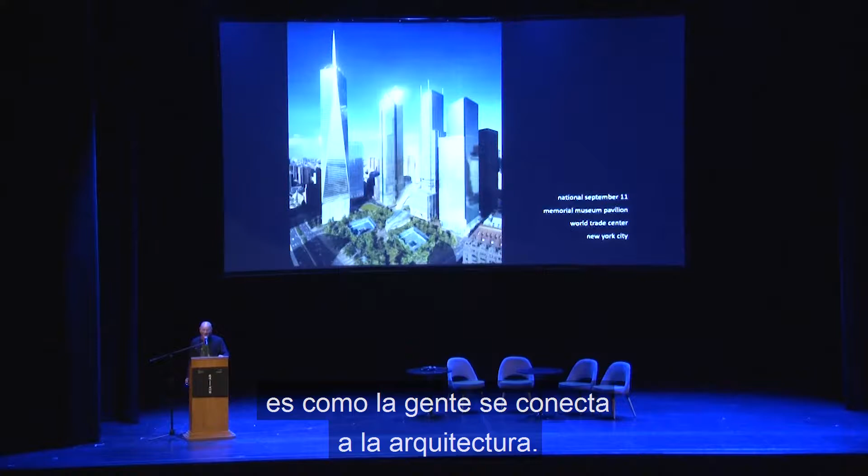Another project which is very interesting in terms of how people connect to the architecture is the National September 11th Memorial Museum in New York City, dedicated to the events of September 11th, 2001, when the World Trade Center towers and a number of other places were attacked by terrorists in planes.

It was a terrible and tragic event, and the rebuilding of that site, if you have never been there, is very hard to comprehend. I suppose an equivalent would be knocking out a very large portion of downtown Buenos Aires, losing your public transportation, losing your government systems, losing electricity. A number of tremendously difficult situations evolved from that day.

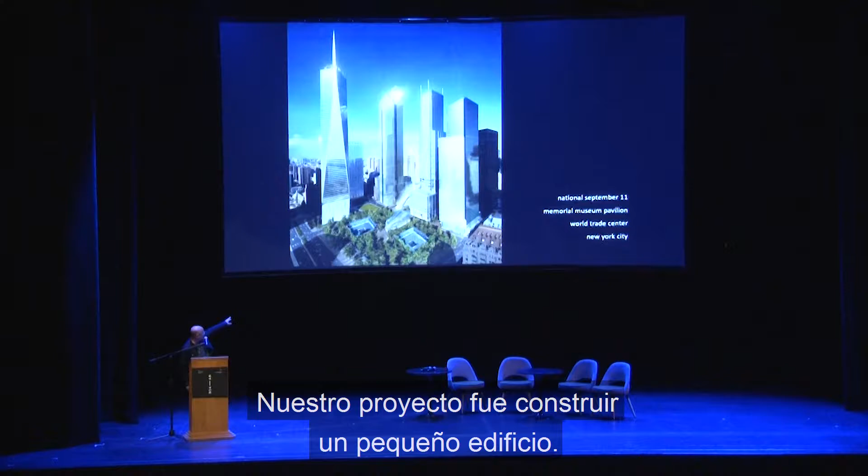So to rebuild that site means you have to work with trauma, with people who have a traumatic psychological connection to this place. Our project was to build one of the only buildings on the memorial site. You can see the small pavilion between the two pools where the World Trade Center towers once existed. The pavilion is quite small in comparison to the tall skyscrapers that exist around it in New York City.

Sometimes I like to say that building small is a luxury. Building big is a kind of gluttonous, overwhelming activity. But building small is truly a luxury in a big city. So we wanted to work with the small character of the building.

We worked with daylight so that the facade of the building would create daylight. It's a stainless steel which has microscopic scratches in it that collects the sunlight and ambient light, so it doesn't need to be direct sunlight. It collects light and reflects it off the building.

So this facade that you're looking at is actually the north facade of the building. It gets no direct sunlight at all, but you can see these bright flashes of light coming from all of the ambient light that exists, being put through the reflective character of the facade and then pushed back out into the environment.

So the building is always filled with light, and one of the characteristics we were most interested in creating here in this place of sadness was to allow people to have a sense of happiness and a sense of optimism. Light is the first step that allows us to see an optimistic future. And understanding ourselves is also interesting.

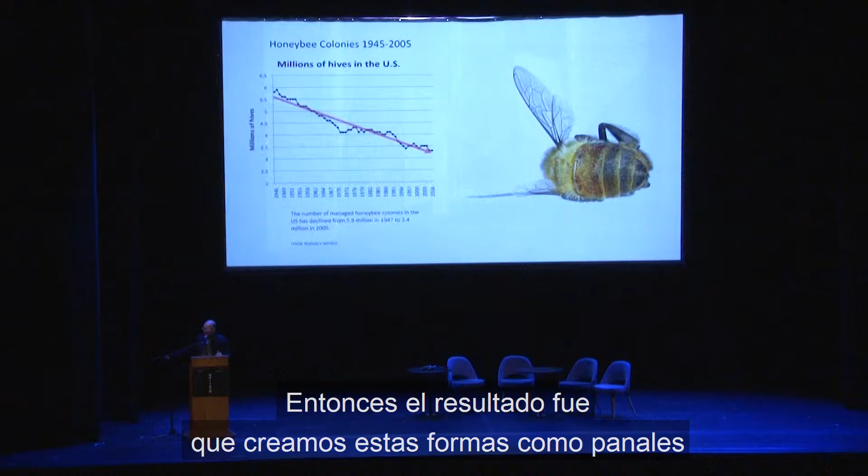So we realized the only way to get people to accept these beehives was to make them really good-looking, super sexy beehives. Then everybody would want one because they're being sold as design rather than bee habitat. The result was these hive-like shapes that can be placed on top of buildings, with a small entry—you'll see in a moment—that increases bee habitat without allowing for domestication.

A traditional beehive can last up to about 7 or 8 years without intervention. A bee in the wild would use a place in a tree for about that time, and once it gets filled up with muck and dirt, the queen bee will just fly to another location and make a new hive. But with this design, you can clean it out every few years and keep it going.

Here you can see the hives mounted on the roof of a building in Oslo, with a very simple entry location. They're really good looking, so a lot of people are now clamoring to get these beehives on their houses, and it can come with a startup kit to get it running.

You can see how the hive was created in relation to natural forms that the bees may be familiar with, except on a much larger scale. We used wood because bees are often used to wood as a natural fiber for building their hives within.

It's interesting when you think about wildlife in relation to architecture. If you look at traditional or historical architecture, for example here in Buenos Aires, there are buildings over 50 and up to 100 years old or more. When you look at those beautiful old classical works of architecture, you'll find a lot of ornament, and often the ornament has animals in it—you might see a lion, a fish, or birds carved into the facades of buildings.

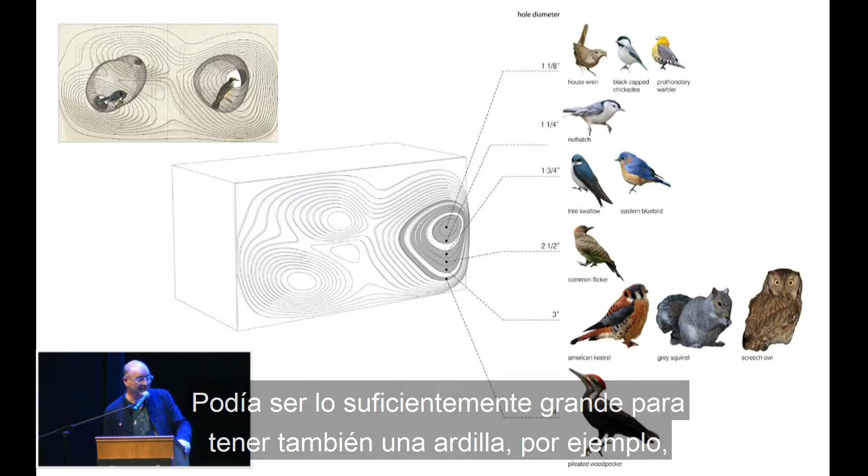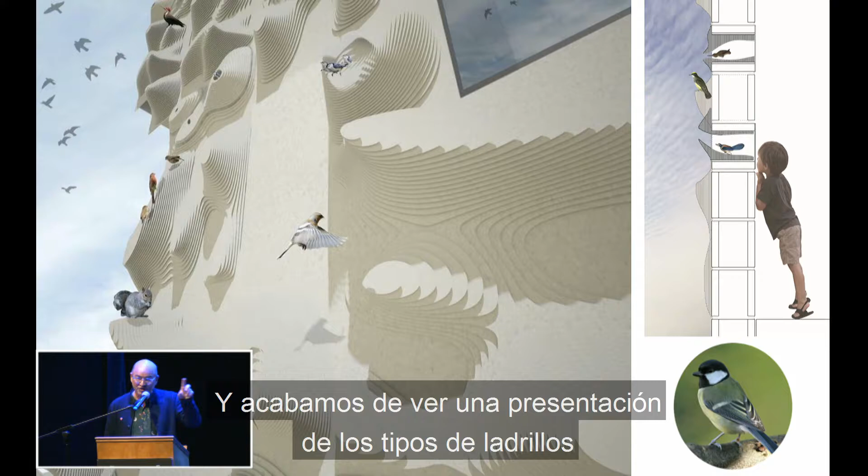You can see the design at the top left, and what happens is it gets inserted into a brick wall. Earlier, just before I spoke, there was someone here from the brick industry showing bricks with little holes in them. So you could theoretically create a brick made exactly with holes for the shape of a bird nest inside it, and then rotate it so it can be accessed by the nest.

On the back side, inside the building, it's possible to put a one-way mirror so you can see in, but the bird can't see out, and you can watch the bird nesting. It'd be kind of an amazing thing to watch. This is probably our second smallest client there on the lower right—a little bird, bigger than a bee.

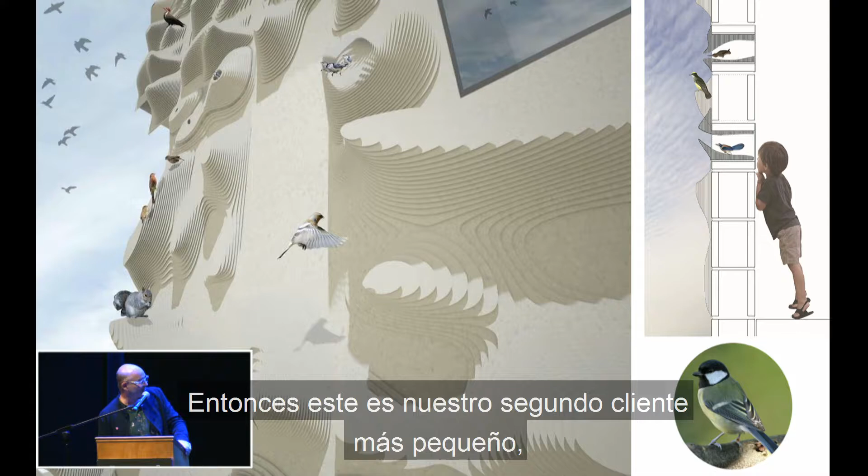But all of these projects are bringing us to an understanding of the world we inhabit beyond that where humans live.

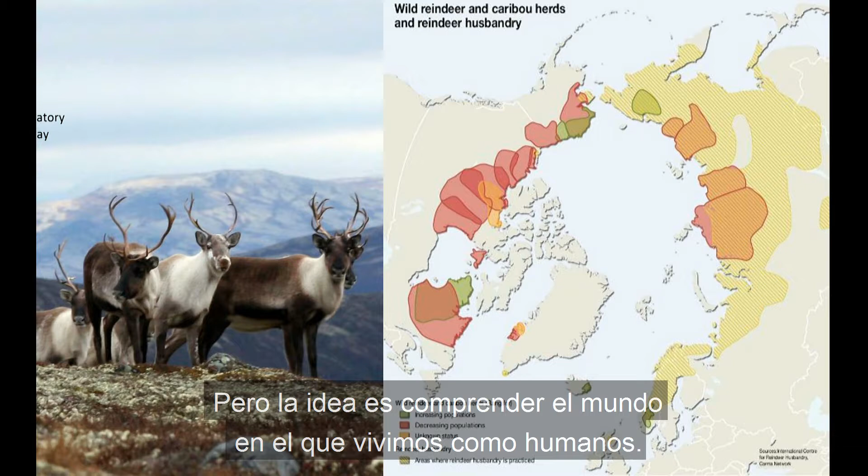This is another project we created in the north of Norway, in an area where wild reindeer migrate. There are only a few wild reindeer places in the world, and this is one of them. The wild reindeer migrate through a valley at the base of the mountain Snøhetta, which we're named after. They need a quiet environment in order to mate.

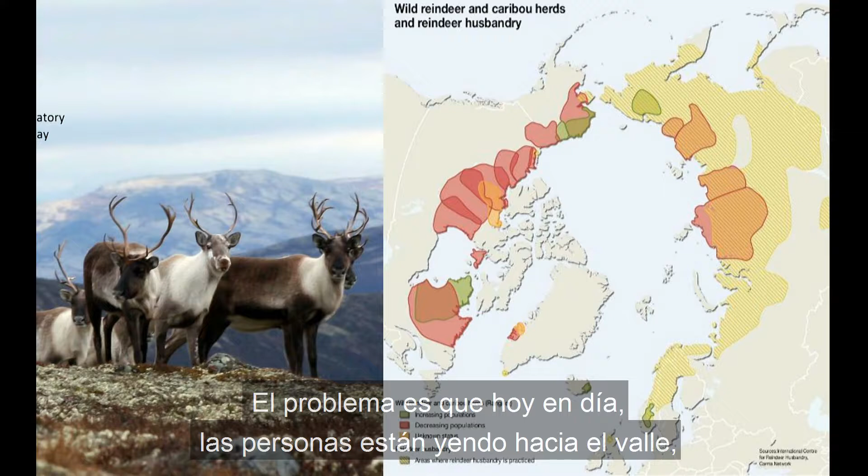The problem is that these days people are coming to the valley to watch the reindeer migrate, and the reindeer are bothered by all the people coming. So we needed to find a way to allow people to enjoy the experience without interfering with the life of the reindeer. We built a sort of pavilion with a wood bench inside, carved by a robot arm—a digitally produced element in the building.

You look out through this glass down into the valley, and if you look in the distance where that cloud is, that's the mountain Snøhetta we're named after. It's an interesting story, and you'll see in a moment what I mean. These brackets you see on the glass were not originally installed—they weren't part of the original design. One thing we failed to understand is that there are animals called musk ox.

I hope the translator knows the word musk ox—it's kind of like a buffalo that lives in this area, and the male is very aggressive. The musk ox would come to the glass, and the male would see their reflection and think it was another male, attacking it by running forward and slamming its head into the glass. So we forgot to think about musk ox.

It was not on the list of things architects normally think about. So we had to do two things: reinforce the window, but more importantly, lower the landscape outside so the musk ox could never see its reflection in the glass. A very unusual thing to consider.

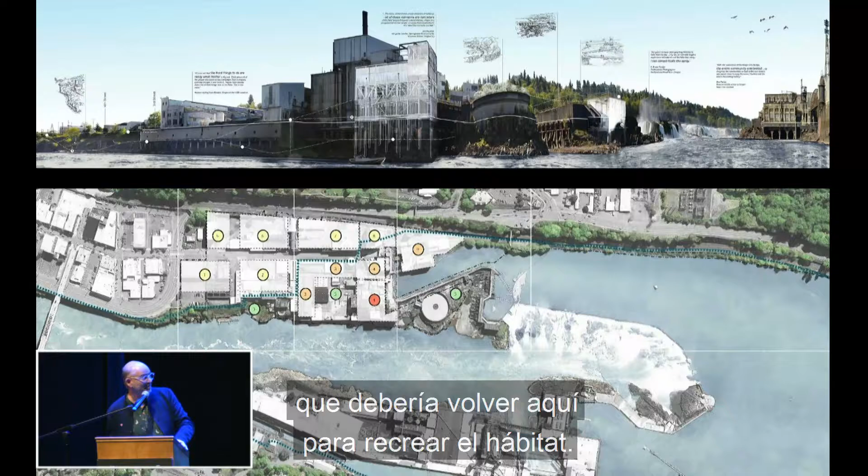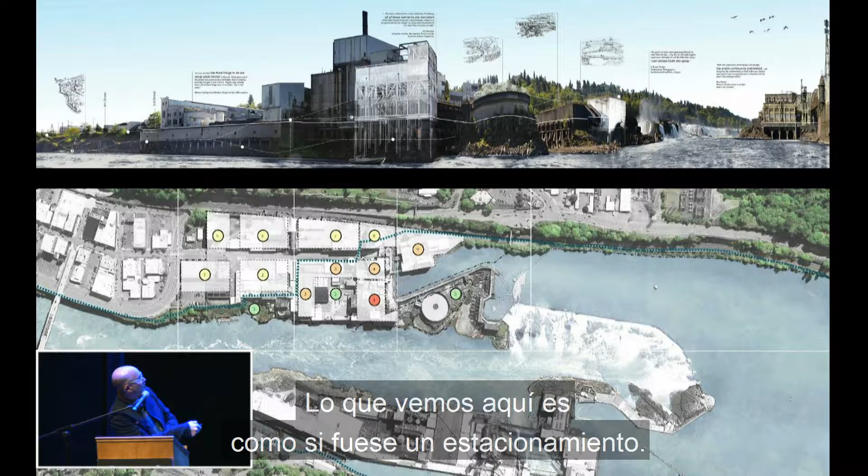So here you can see the edges of the existing situation. And what you see here is like a big parking lot, big flat space. So if you walk along this road and turn into this parking lot, you'd think everything was flat.

But we discovered when we were climbing around the space, figuring out what to do, under the concrete is the natural terrain of what was there before the industry moved in. So they built everything on columns, and it's floating above the natural landscape. So we recognized we could pull these concrete surfaces up and re-expose the landscape and allow the water to flow back along the edge of the waterfall.

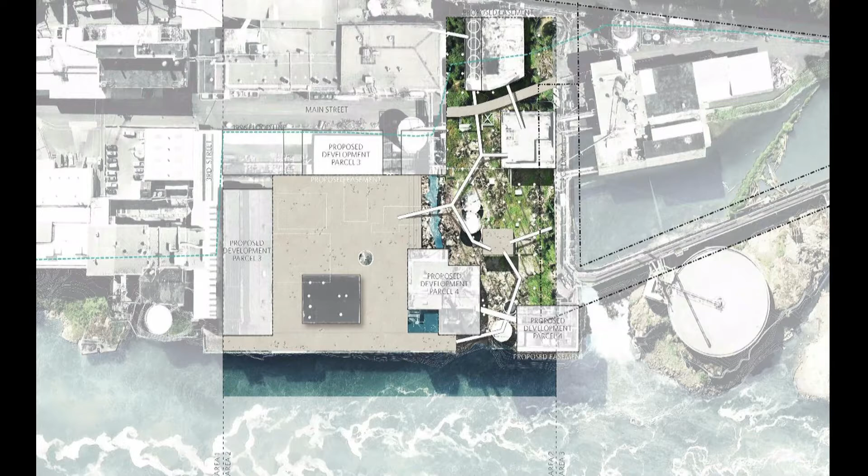So here you can see, maybe you can see how we did it. This is the concrete parking lot that I was describing before, and what we're doing to it is pulling the concrete up, re-exposing the terrain, revegetating the terrain, and allowing the water to move from its existing locations through these spaces and down into the river.

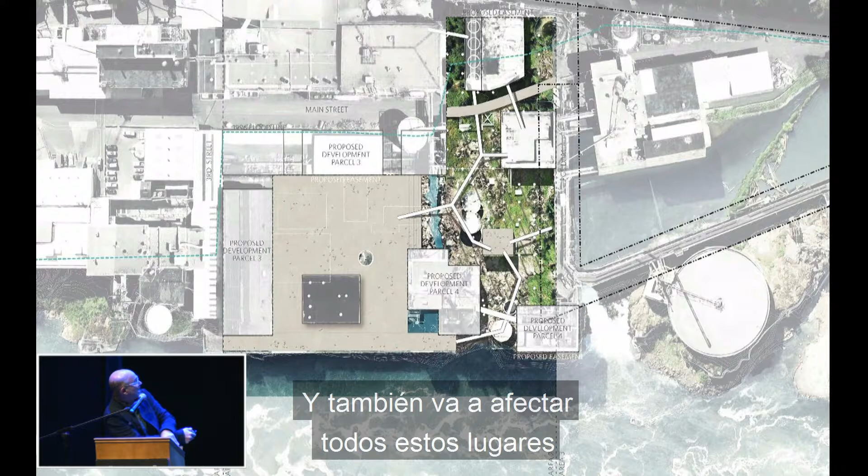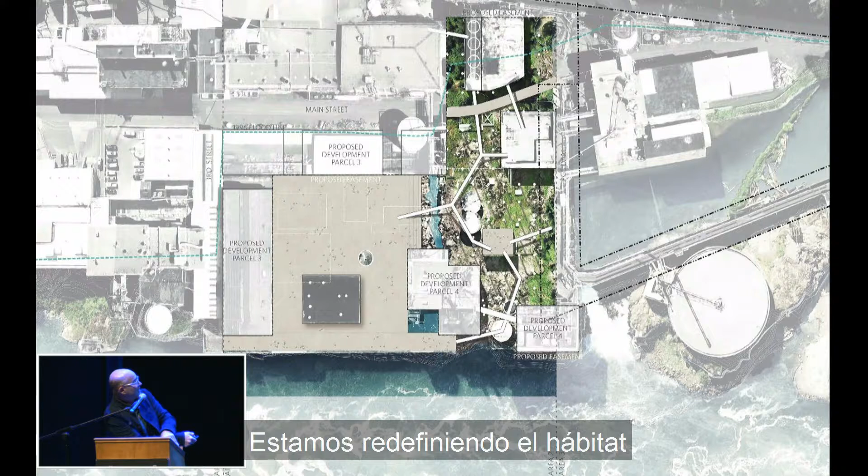And it will move along all of these spaces as we allow the water to flow under these surfaces, because, as I said, it's natural landscape under there, and it will reappear in other locations. And we're redefining habitat in some of these industrial spaces where we will put landscape in them and create new places for birds and other animals to live.

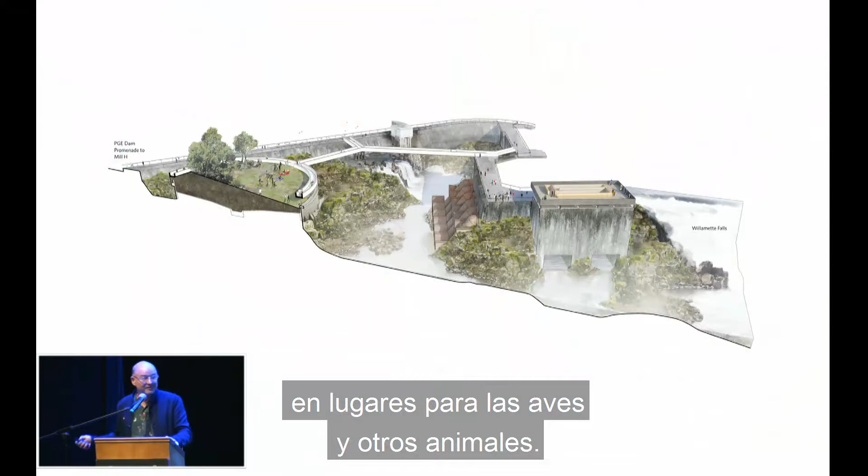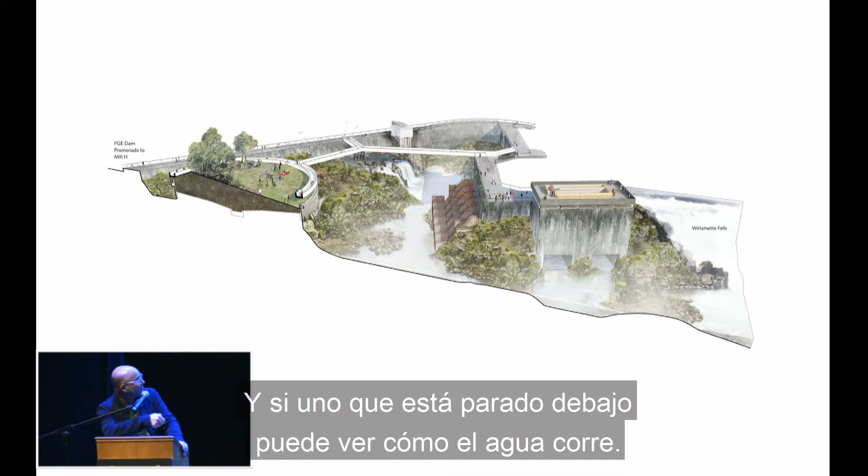Here you can see some views of how that will be once we're finished. And this is an amazing building here. In this case, we are allowing the water to run through the building under your feet. And as you stand up here, you can look down and see the waterfall running. So you're experiencing both the historical architecture and the natural phenomenon at one time.

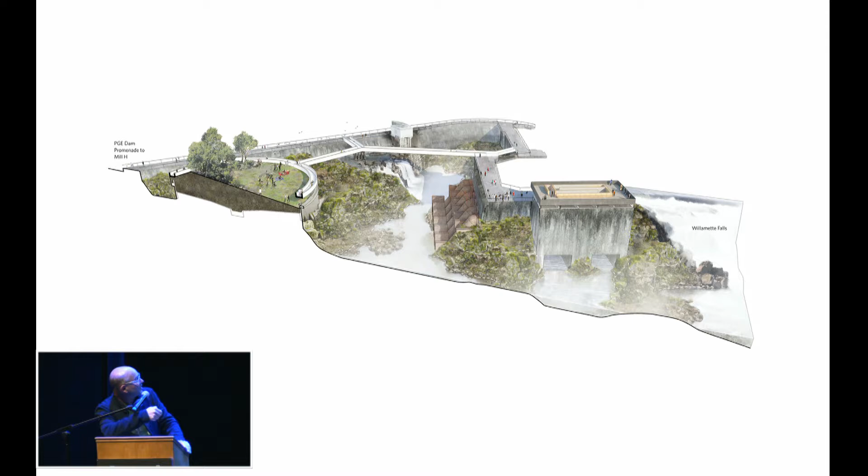And here's where water is coming around the edges and spilling over. And at certain times of the year, this will flood and be completely underwater because we're reopening streams upstream.

Apparently I'm hitting some funny button. There you go, I'm hitting the blackout button.

Here you can see that structure I just mentioned to you, where you can walk along that wire frame, look down, and it gives you access out to where the waterfall is, so you can enjoy it for the first time in about 150 years.

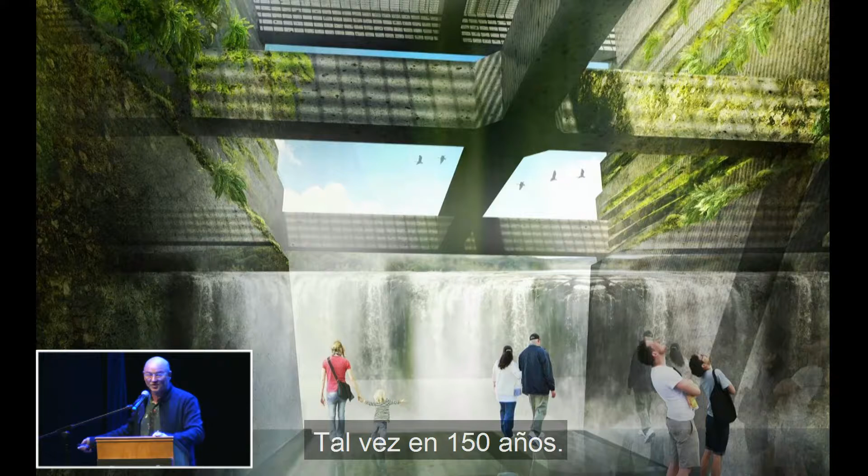We'll cut through some of the concrete structures and build bird nesting areas at the top where people can't touch them, and once again provide access to the water's edge so that the people will feel they can enjoy these structures. Once again, here's some more habitat we're building into these old concrete structures, concrete and steel.

This is a beautiful one. It's a silo, and you walk through the silo on a wire bridge, and it has a dome top with an oculus. And so when the water flows below you, the sun comes through the oculus and reflects back up into this space, and you'll hear the water and see the reflection of the light off the water at the same time. Should be very magical.

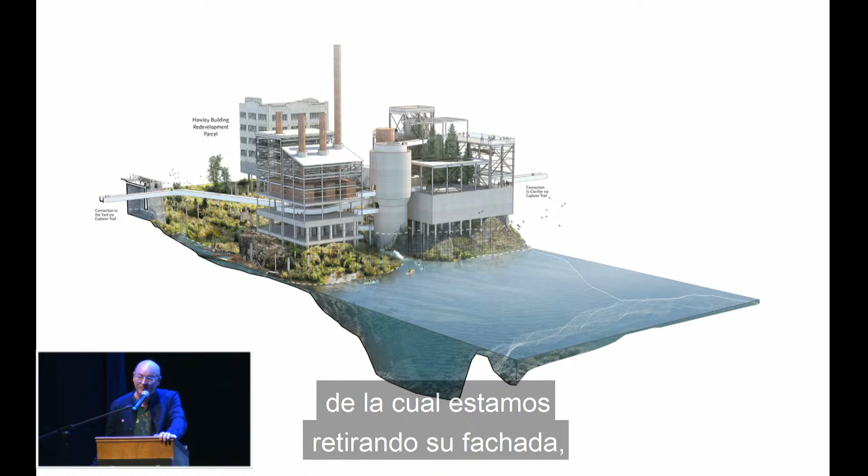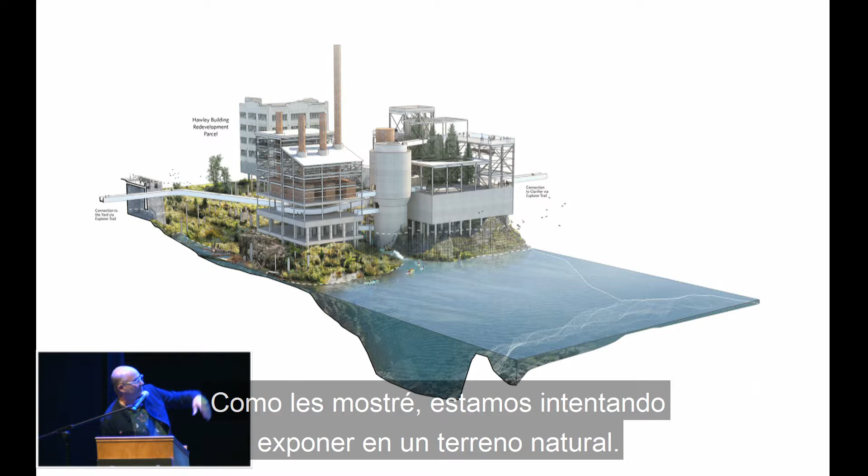Here's another building that we're ripping all of the facade off, which is very dangerous metal facade, and planting a forest inside of it and making some play areas for children, and as you can see, removing more concrete to expose the natural terrain. And this is looking at that building where there's a fun children's slide. If I were a kid, I'd really love to climb up there and slide down this thing.

And then this on the left is this concrete tank that I showed you, a big circular tank. It's currently empty and concrete, and we're going to fill it with soil and make a garden inside of it that you can walk around.

Another place where you're looking off to some of the cultural facilities. We're leaving the brick chimneys exposed. This has led to a number of other projects along the water.

This is our most recent and rather famous project. It's in the news, I think, everywhere right now.

It was built in a shipyard and brought by boat to this location and dropped into place. It actually opens in a month, so although I only have renderings right now, the building is nearly complete. It's fairly easy to find online if you look up Under and Snøhetta - either something really weird will come up, or it will bring you to this building. You can see how it works.

You come down under the ocean, and what's important about this building is it's not just for commercial use. The concrete has been treated on the outside to maximize marine life, so it will grow oysters and shellfish on the outside surface. We're training the fish to come here so they'll have a safe place to find food and an environment for mating.

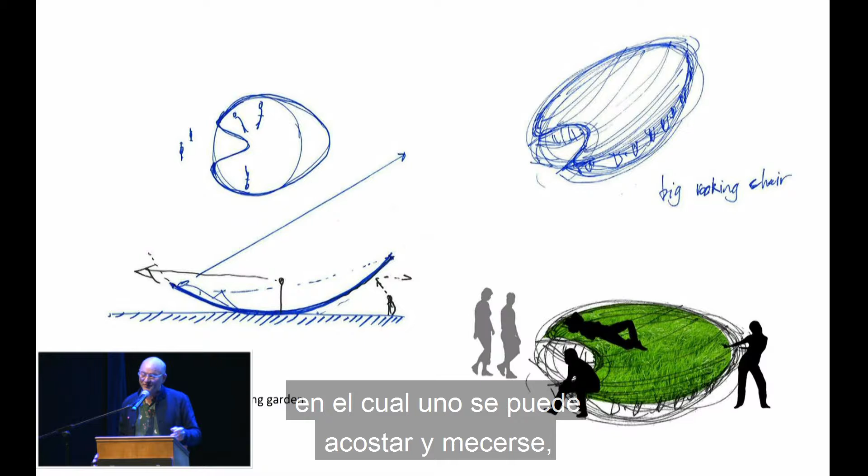We have a number of these projects, but a smaller project which was fun was an urban project in which we made a park that rocks like a rocking chair. We made a little garden that you could sit on and rock back and forth as if you were in a rocking chair, and it was to be placed on the sidewalk in San Francisco.

The problem was one of the architects had a dog, and the dog just constantly wanted to pee on the grass. So we had to spend a lot of time telling the dog it couldn't pee on the grass, which was a very strange thing to do in an architecture studio.

But we eventually finished it, and it was set up, and it became very popular. It was up for about a week. They want to build some more of these. The kids really loved it because they really liked rocking on it. It was safe and soft, and it smelled good - the grass was smelling very good. So it was an interesting way of bringing a small park into a very busy city like San Francisco.

Working with children is always fun, and if you've never had the opportunity to do something where the children are the client, I hope you will get that opportunity one day, because kids just are so open and crazy. As an adult, you can more or less propose any crazy idea, as long as it's safe, and everybody will accept it because it's for kids. When it's for adults, we say, oh no, that's not mature. But for kids, it's okay.

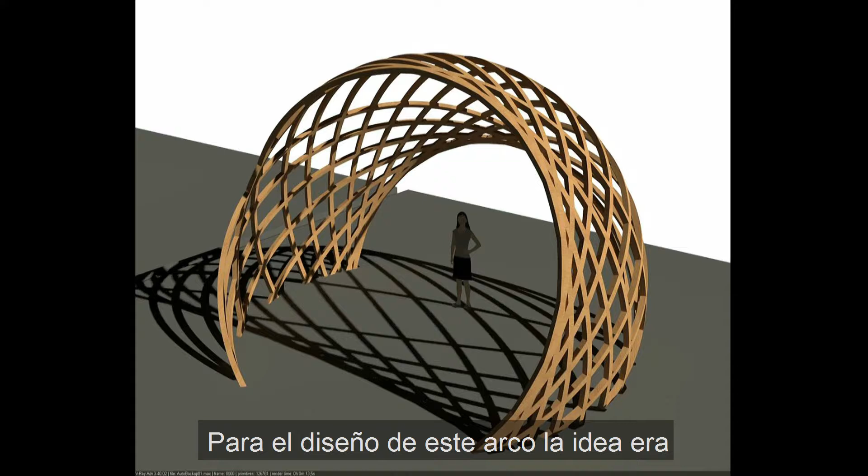So the design for the arch was to intertwine 14 pieces of wood in such a way that they would be self-sustaining and self-supporting structurally, so they would hold themselves up. And you can see that the sphere obviously is a very good way to do this.

These were pre-stressed into the circular shape and then woven into each other, and each one of these wood beams has a line from the Constitution in it.

When we showed this structure to Desmond Tutu, who's very old and has a very good sense of humor, we asked him how he liked the architecture and design of this big sphere, since it's dedicated to him. He said it's very nice, but I think you have to work harder to make my nose more accurate, referring to it as a statue rather than an arch. He was just joking, but he really liked the contemporary architecture and where it was taking South Africa.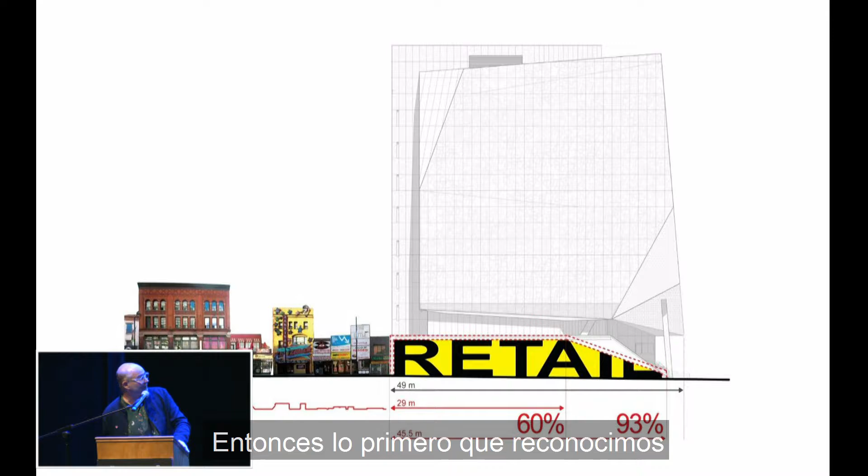So it brings us back to the polar bear discussion we had earlier. This is going to make people angry, and it will create a kind of strange environment around it, which it did over time. So our job was not only to add on to this library, but to help improve the environment around it. So the first thing we recognized was that we needed to have shops and retail in the lower portions of the building.

But rather than just adding shops, we built them with a ramp that leads you up into a raised lobby that brings you into the library above. And the shops would be at the same scale as the nearby shops.

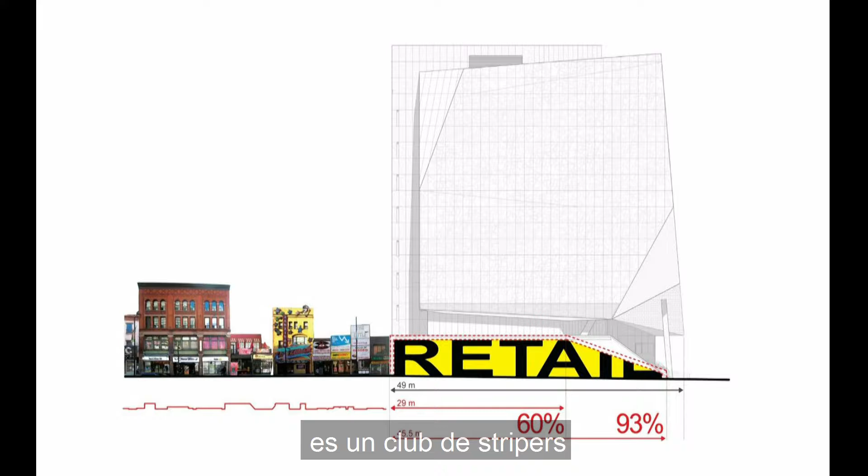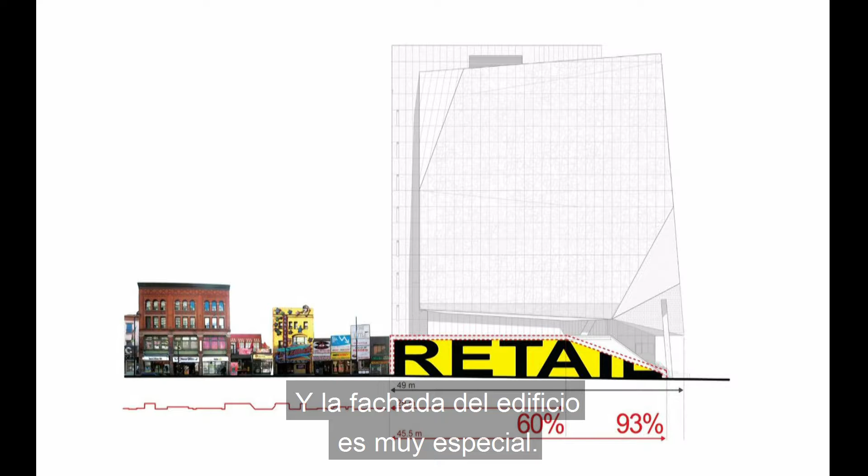It's very funny, one of the buildings on this street, if I can get this to work, this building here is actually a strip club, a place where women take off their clothes and men come to watch. And amazingly, the facade of the building is so special that the city of Toronto actually gave them $500,000 to maintain the facade as a historical object.

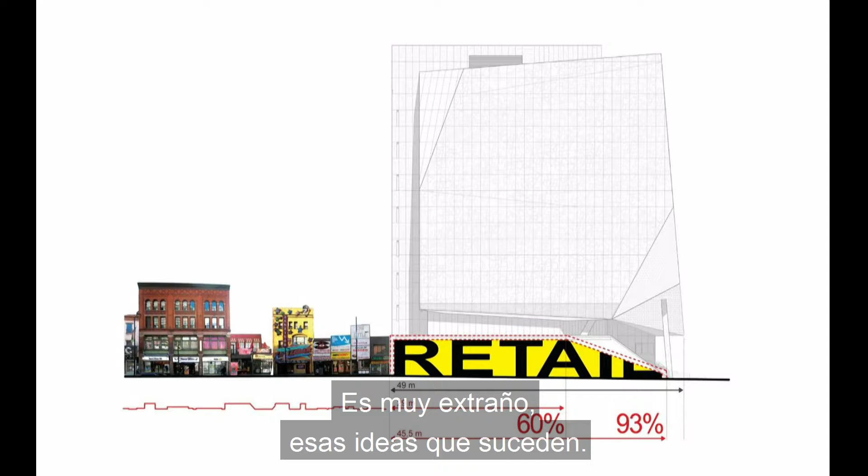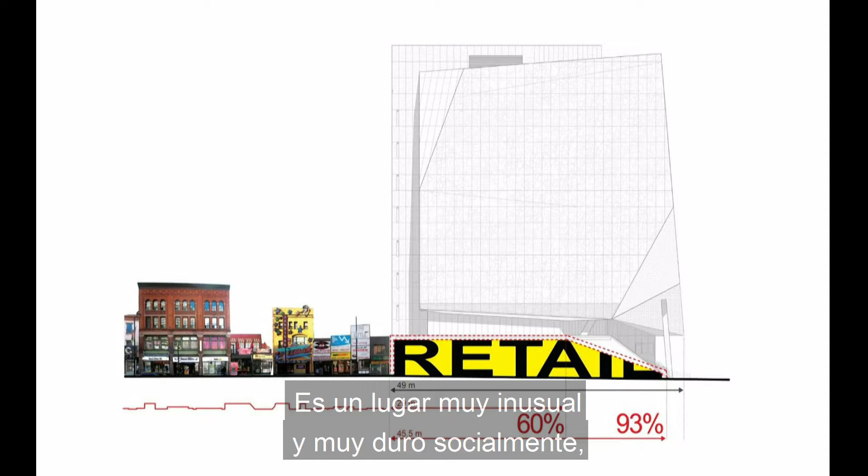So very strange, that kind of idea. But anyway, that tells you a little bit about the character of life on the street. It's a very tough place and a very unusual place as a social condition. But as I said before, humans are not perfect. We're very irrational, and things happen in life that we can't always control. However, we can control new things that we make.

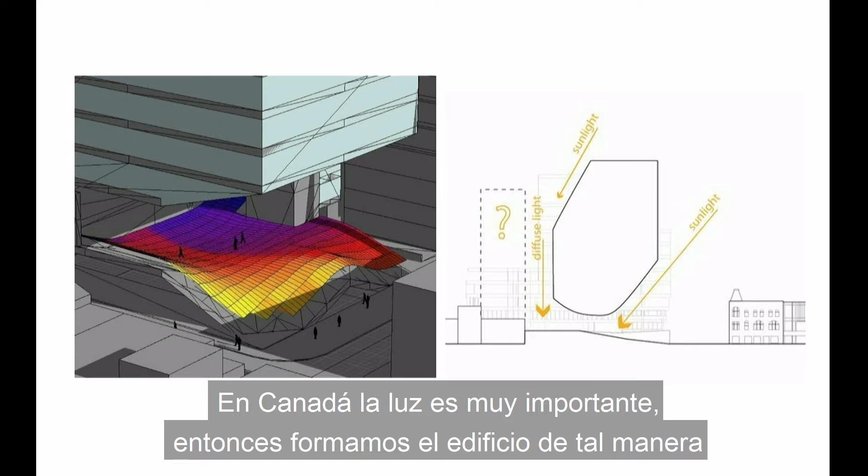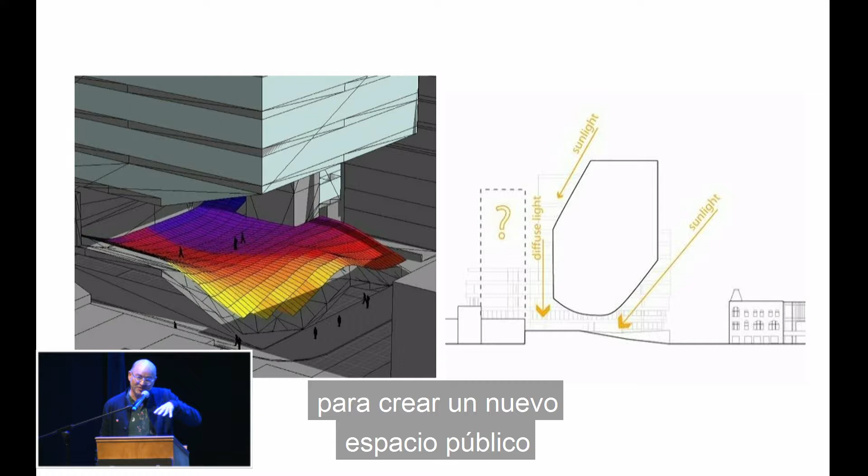In this case, we wanted to make a comfortable place that was filled with light. In Canada, light is very important. So we formed the building in such a way that would allow as much light in as possible. It faced south. We molded the shape to allow sunlight in, and we lifted the volume of the building up so that it created a new public space below the library that was accessible by anybody.

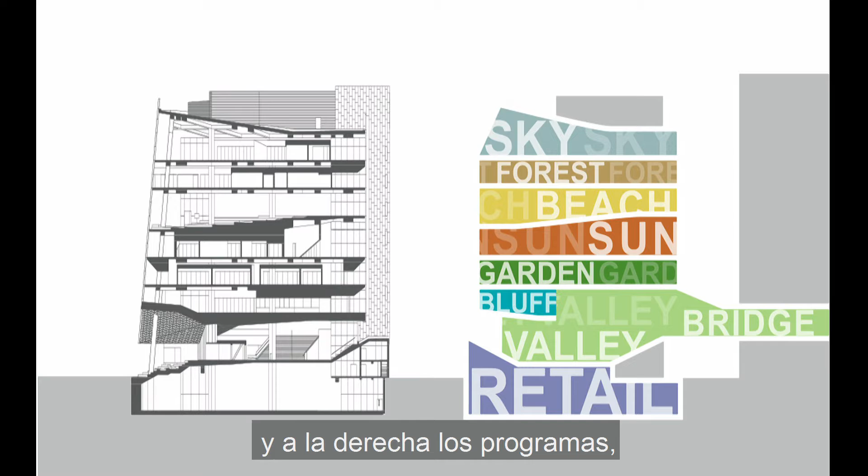That idea is really interesting because it lets us understand our world in something other than an abstract number. You're essentially reintroducing the landscape into a high-rise building, and that changes our connection to it. Here you can see the actual section on the left and the program section on the right, and the plans are wildly different from one another—each has its own character, plan, section, and color hue.

But the truth is, because the light inside this room is stronger than the light outside, and the glass is only green-tinted, the inside effect is like normal light, while the outside looks green—because light travels from where there's more light to where there's less.

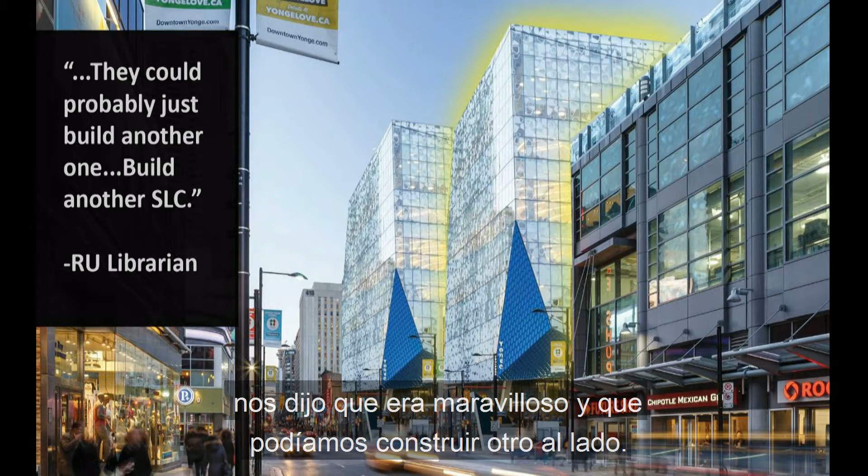One of the librarians was asked what they thought about the building. They said, well, I think it's great. Let's just build another one right next door. So that's the collage of two of them next door to each other.

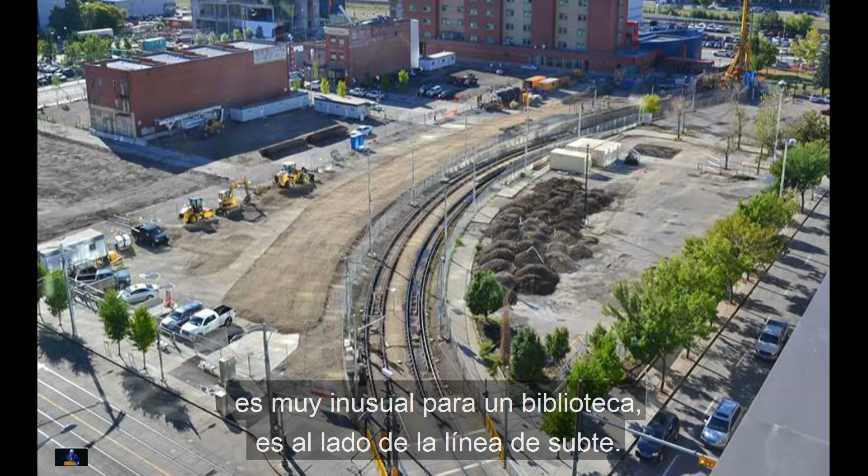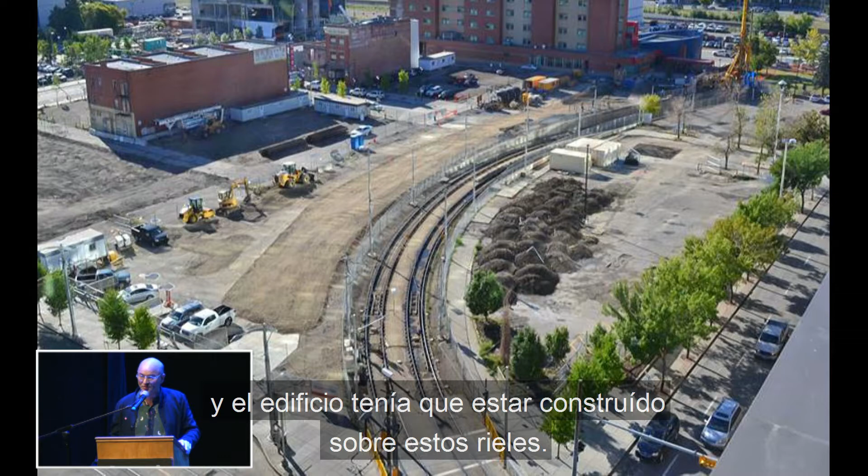Another library we're finishing right now is in Calgary, Canada. It's a very unusual location for a library. It sits right over a subway line. The subway is coming out from underground to the overground, and it's on a curve, so it's both ramping and curving at the same time. The building had to be built over this, so a very unusual place to make a building, especially a library.

There you can see the site in the context of Calgary, the City Hall on the left, and a bunch of empty parking lots at the time to the right. These are now, as a result of this library, being developed into new residential areas, new retail areas and restaurants, and all kinds of new life into this part of the city, partly because of the investment in culture going on here by the City of Calgary.

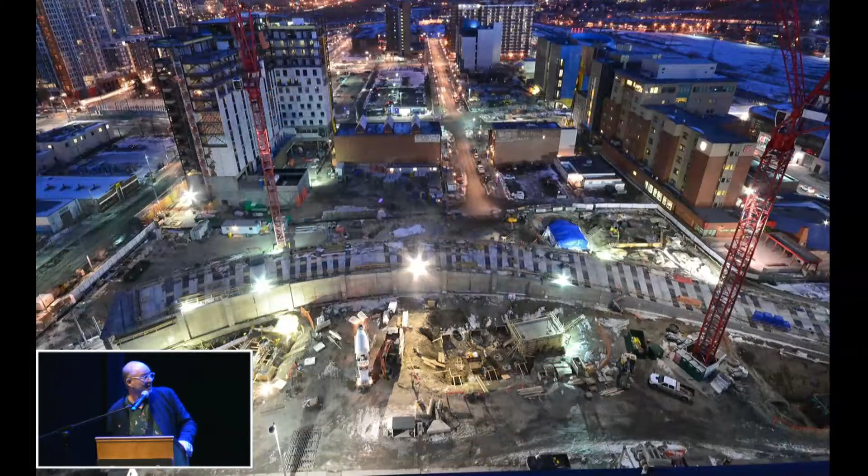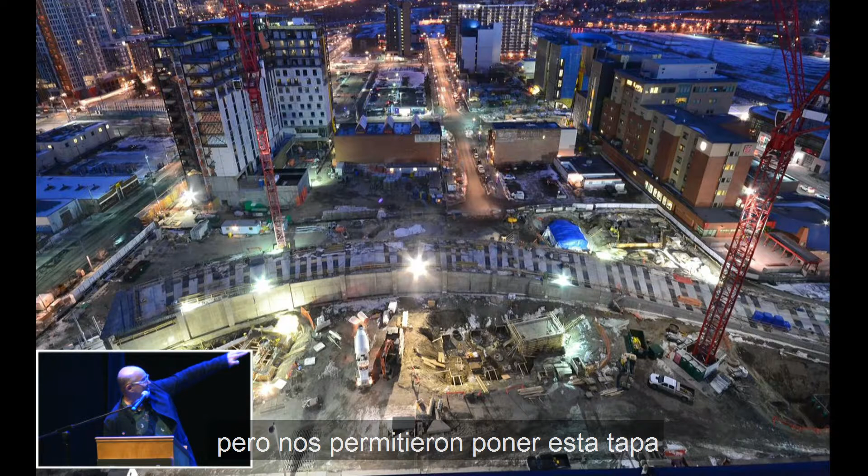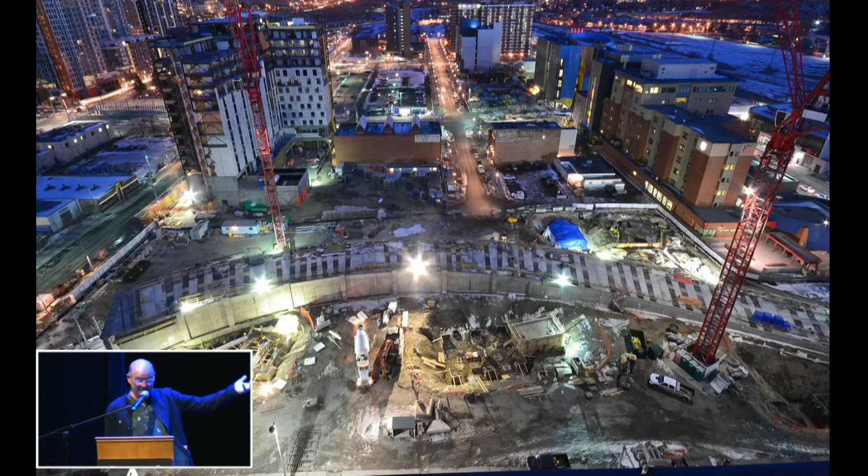We had to put a cap over the tracks, which was very difficult to do before we could build the building. You can imagine it's very difficult negotiating with transit authorities. They're very inflexible, but we eventually got them to let us build this cap, and then we built the library over it. You can see the curving shape of the infrastructure, and our building takes that curving shape and makes it into the actual plan of the building. You'll see that in a moment.

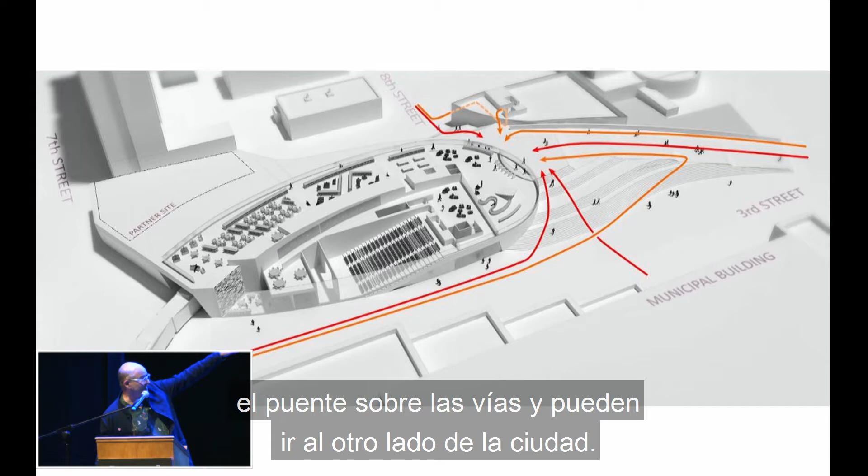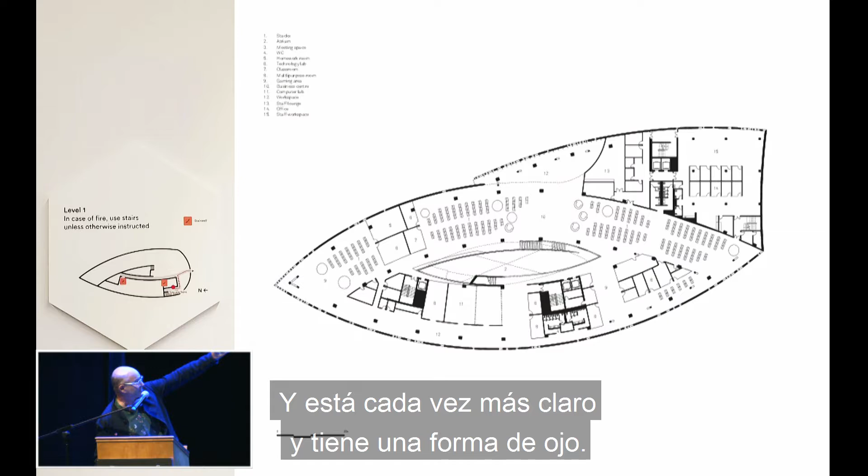Here you can see we had to bridge over the train tracks to get to the other parts of the city, and this curving shape is a reflection of the train tracks below. As you move up the building, the curves are more and more clear, and it creates this eye shape, like an eye on a fish, and a fin on the back, which is where all of the workspaces are for the people that work in the library.

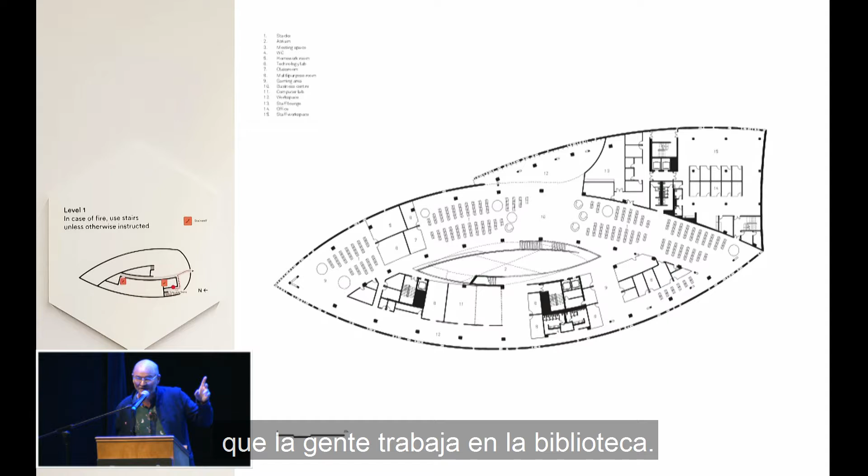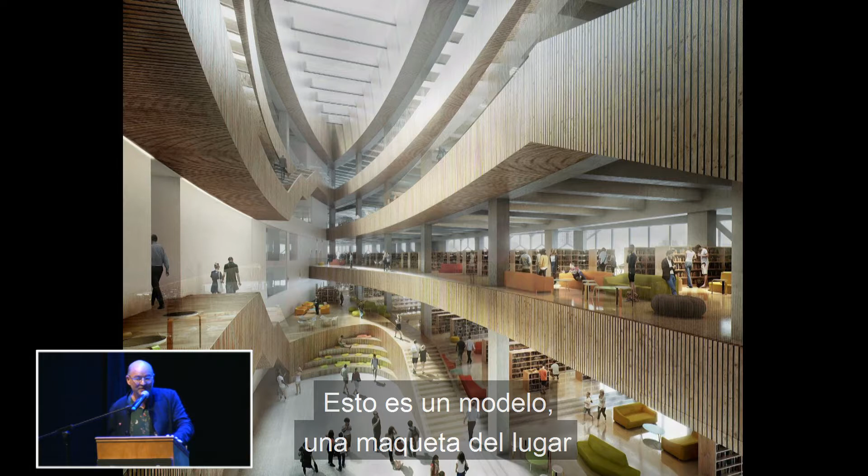Here was a rendering of the main atrium space, which is filled with daylight. And here's an image I took just a few weeks ago of that same space. It's just finished construction. We had a wonderful ceremony in this space where 8 indigenous tribes came together and blessed the building so that it would avoid bad spirits in the future. That was a nice feeling.

You can see the wood sort of cycles up through the building. Because the atrium is very long, when you enter the building at the lower level, you can immediately see all the floors, and it's easy to figure out the organization and arrangement of the building. Because a library has so much knowledge embedded in it, it can get very confusing to use it, so our idea was to make it as simple as possible, but also challenging in the way the architecture represents itself.

Here's some more views of that space while it was under construction. The wood is acoustic treatment behind the slats so that it has a nice sound when you walk in there, and all the light is natural from that canoe-like shape above.

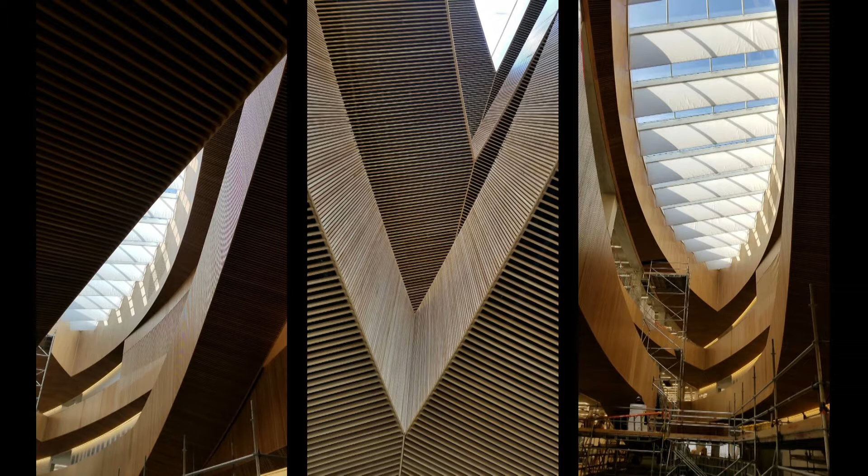They were mostly used for discussing things, and this is where Plato and Aristotle and the great thinkers of Western civilization grew their ideas.

Our new library in Calgary has a similar character. You walk along these passageways, and there's a rhythm to the ceiling, a rhythm to the book layout, and a rhythm to how the room reacts to daylight.

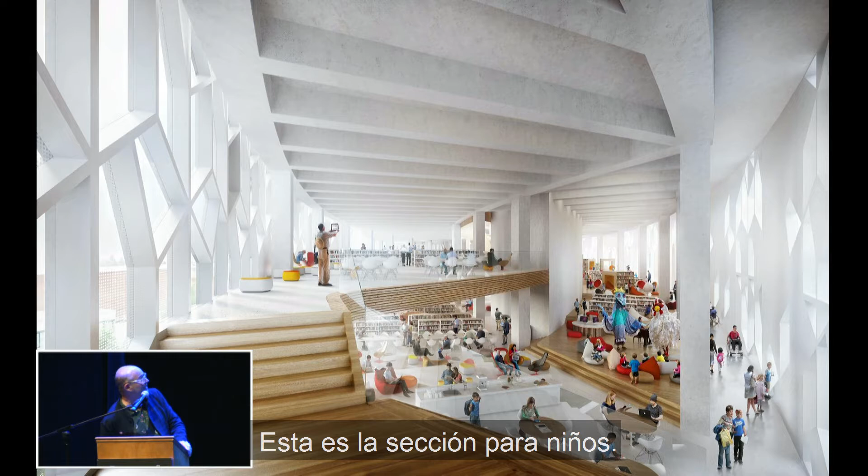As you move along, this is a rendering of the children's library. You can see those two arcades coming together at the points of the eye shape that the plan is built around.

Well, I don't know if you can turn off my picture for a second so you can see the whole slide. Can the camera turn off my bald head? Not possible? My bald head is basically stuck up there?

Okay, well, if my bald head weren't there, you would see this beautiful light coming from under the table, and this screen diffusing the light from the inside of the atrium. So it's a special place in the building, which is very quiet.

As you walk along the facades, the light comes through these crystal shapes and reflects off of the side surfaces, and you get this wonderful changing light experience as you walk along the edges.

There won't be books or bookshelves in these places. We actually thought about it because we knew somebody one day might want to put a chair or a bookshelf there, so we made them too small for either of those things. So they have to be walkways.

And it's really nice to feel all that light along your skin as you move across the facade.

This is an early rendering which was building upon indigenous people's art from the region. There are a number of tribes there that are creating very interesting art in the American Northwest.

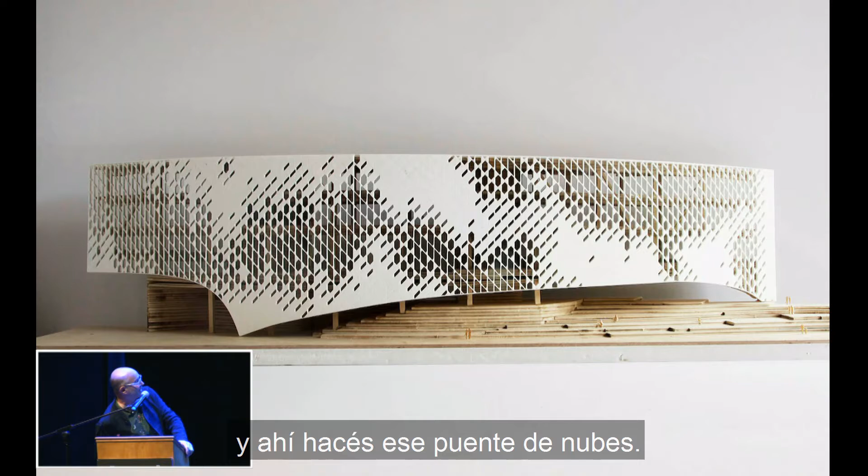We also looked at climate and weather phenomena. This is a cloud bridge, which only occurs in this area of the Rocky Mountains. It's a phenomena where there's low pressure and high pressure meeting, and they make these bridges of clouds. We worked on that in the development of the facade as if it were a natural phenomena.

Reaching up over the site, over the subway line that made the curve below. And somehow these two worlds would come together.

We were also interested in oil lamps. That is an oil lamp where my bald head is blocking the view. And so up above you can see its relationship to the lamp and our early study models.

And here you can see the building as it's nearly finished. At night, of course, the library will be heavily used, and so it lights up the street, and the streetcar just comes right out from inside of it. So every 10 minutes or so, it will spit out a streetcar or suck one in, depending on which way it's going. And the underside of that is wood, western cedar wood.

And it bridges up over this outdoor space where you can walk from one side of the city to the other without going inside the building. It's the bridge that goes over the subway line.

And so here you can see that under construction. It's massive - about 15 meters high and about 80 meters long, and it's like a wave, a giant wave of wood that you walk under.

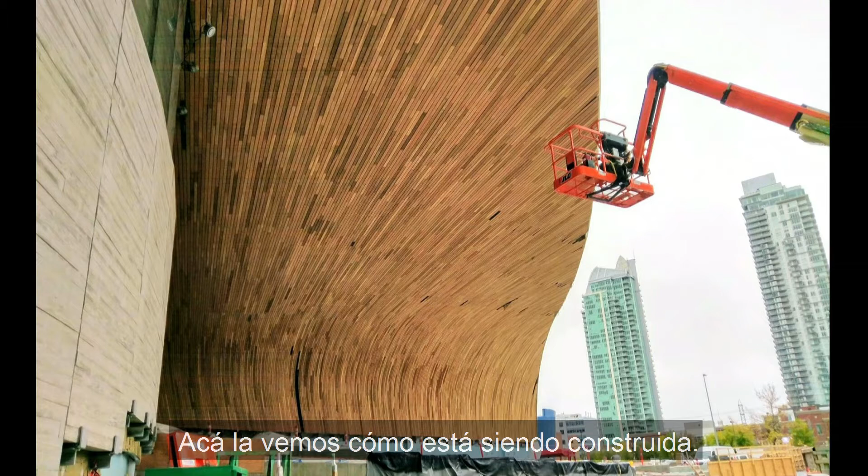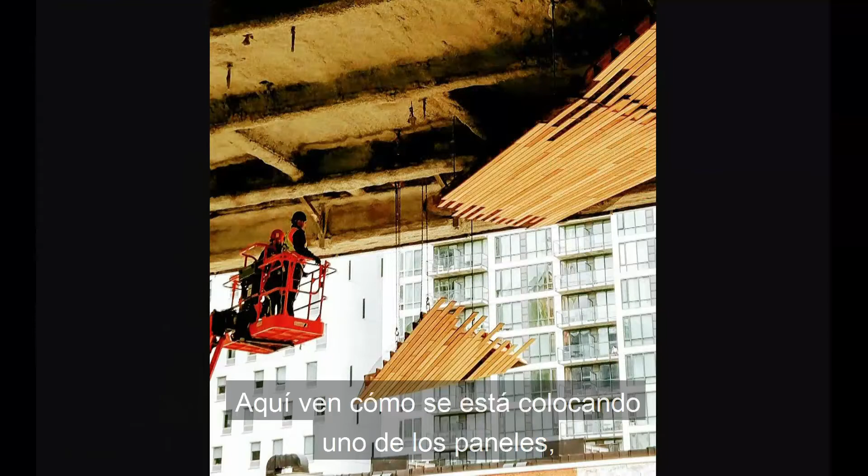Here it is under construction. Each of those pieces of wood were individually formed with steam and placed in panels. This was all done in Canada, where they have great woodworking skills. You can see one of the panels being hoisted in place. They each fingered together - everyone was unique. It was rather amazing to watch them build this.

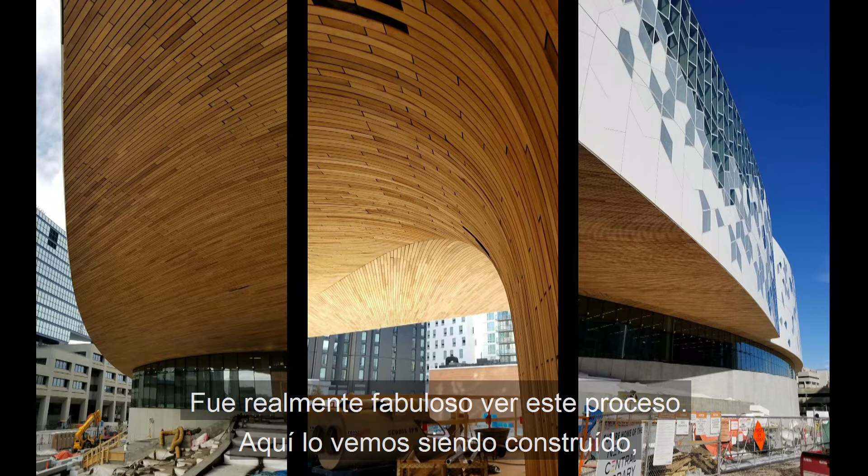And here it is under construction. You can feel this wave just going up over your head and framing the view on either side of the building. We also created a project for Times Square in New York City, where we took all of the cars off of Broadway permanently and replaced those streets with plazas for people.

It's always been chaos of cars running into each other, and actually cars and buses would run over people a lot, so there were a lot of pedestrian deaths here because people would find themselves being hit by a car or truck. Very unsafe. So we wanted to make it safer, and we wanted people to feel more comfortable and still get all the excitement of Times Square.

43 million people visit Times Square every year, so it's one of the most heavily visited tourist locations in the world. That's a lot of people in a very, very tiny space. People just don't feel comfortable in that space.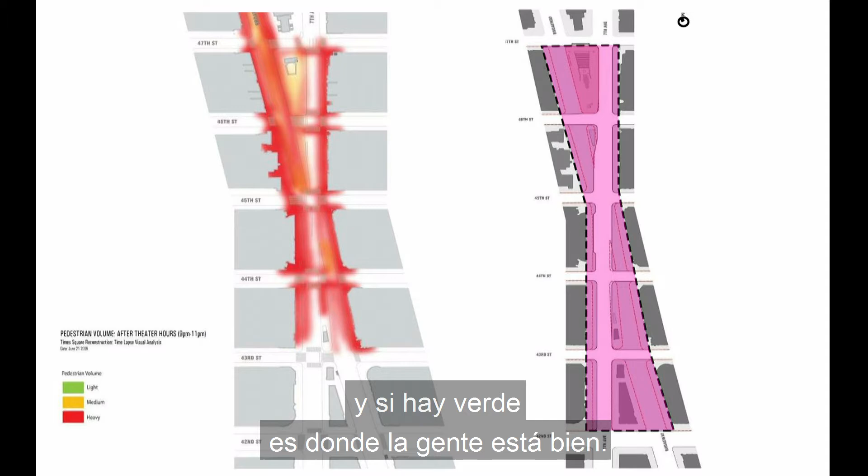This map on the right is where we evaluated people's proximity to one another, how they moved. We watched them live, and we also had cameras that watched people move. We set up a series of criteria that told us when people were angry or upset with one another, and started to map that out. The red here shows where people are really angry, and any green at all is where people feel comfortable. Before we started this project, everybody was angry—it's all red. So we tried to turn some of these areas into green.

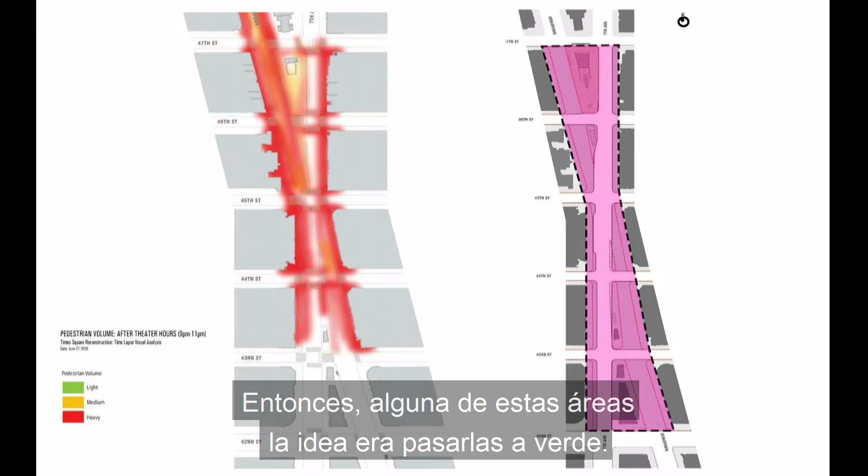On the right, you can see part of the area we were working with—this is the Times Square vicinity. We took the streets and changed them into pedestrian plazas. You can see some of them here leading off to southern Manhattan, and on the left towards the north. Those plazas are occupied by festivals and events, people crowding together without the fear that they're going to be hit by a car.

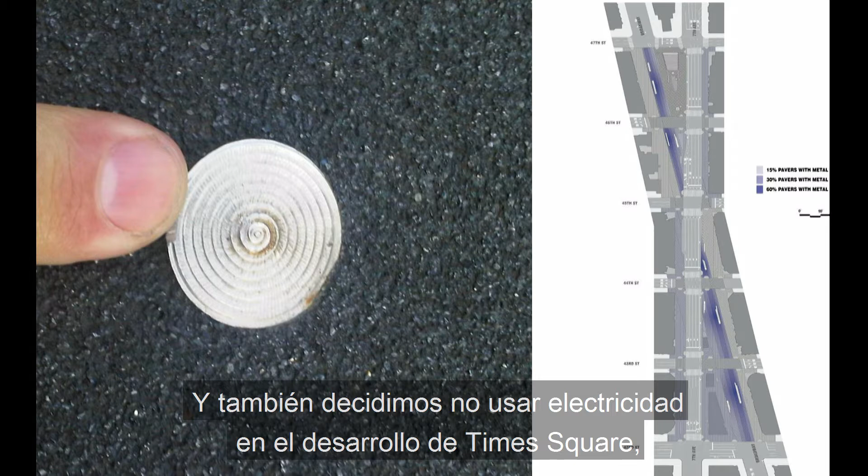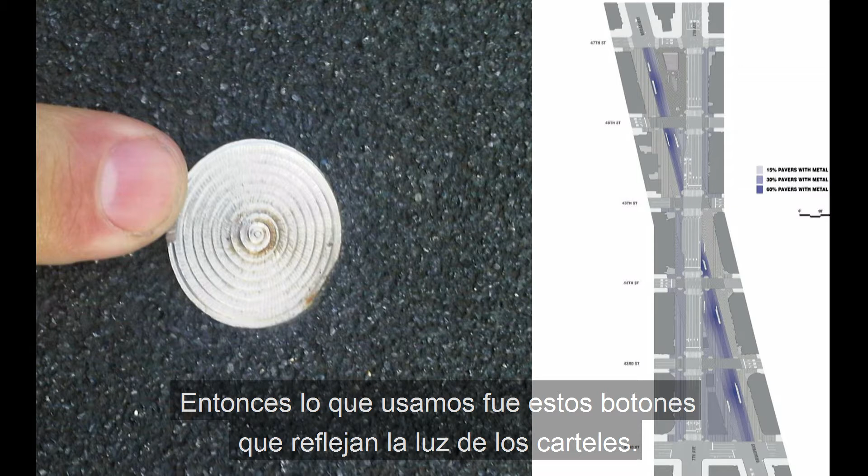We also decided not to use any electricity in the development of Times Square—there's enough electricity in all of the billboards and signs on the buildings. Instead we use these reflective buttons in the ground, and they reflect light from the billboards, creating an interesting sense of light all the time, even when there's no electricity running through them. They're based on the old marquees of the theaters that used to be in Times Square, like the little lights that lit up the entrance to the theater.

There are a lot of events on Times Square. Most people think it's just where tourists go, but there are 350 events a year—everything from yoga on Times Square to horse displays and even bull riding, like a rodeo.

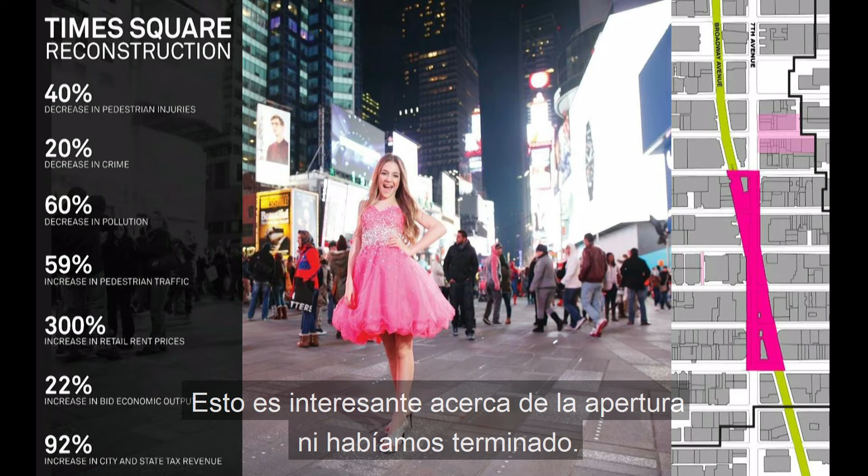These are some statistics we got after we opened, or near to the opening—we hadn't even finished at this time. There was a 40% decrease in pedestrian injuries, 20% decrease in crime, 60% decrease in air pollution because there were fewer cars and related pollutants, and a 60% increase in pedestrian use through Times Square.

So actually numbers of people rose, and the result of that, and this is amazing, there was an increase in rent prices of about 300%, which meant that there was a nearly 100% increase in tax revenue going directly to the city. So after this space was built, there was enough new tax money coming from the shops at Times Square to pay for the entire Parks and Recreation Department of New York City for 6 years straight. That's how much money was made. You could pay for half of the police department's budget for the year, just by creating design and understanding public space in a positive way. So there's always a way to talk to politicians about this if you can tell them they're going to make money. And that's very important to them.

As we get near the end, I just want to show you another project. We just finished the San Francisco Museum of Modern Art. It is now the largest museum of modern art in the Americas, although the Museum of Modern Art in New York found out about that statistic, so they're starting to expand so they can be the largest. So it's kind of a race to see who's the biggest, which is a weird thing, but this is what happens. We were expanding onto an existing building by Mario Botta.

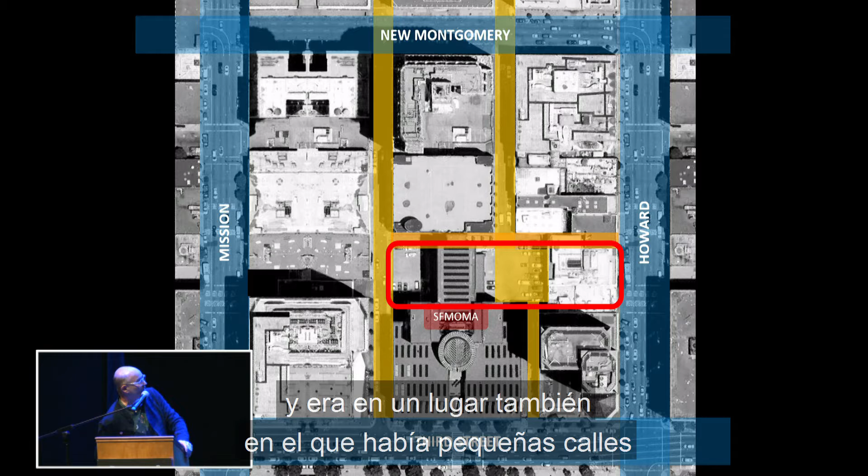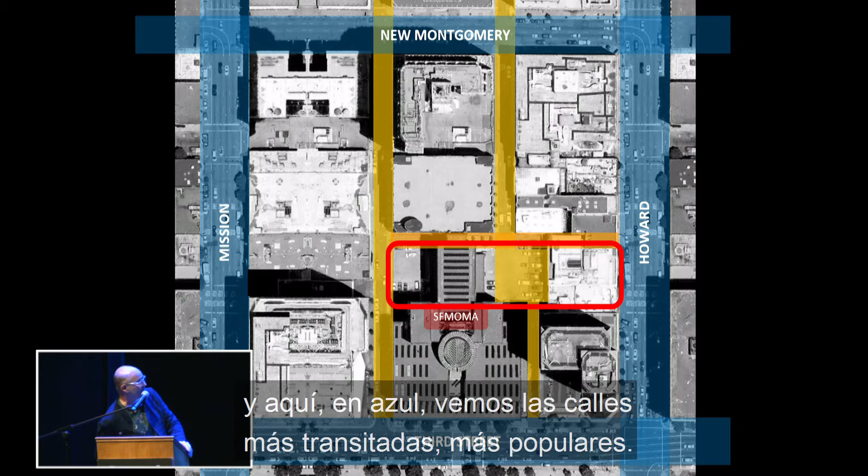The area for the expansion was to the rear of the museum that existed by Mario Botta. It was also a place where there were a number of small alleyways, small streets that nobody used because they were scary and there were people with drugs in the back alleys. The big streets in blue that you see here were very popular, and everybody used those, but nobody used these little yellow streets. They were too small and too scary. So we wanted to reopen those streets and make them more popular again.

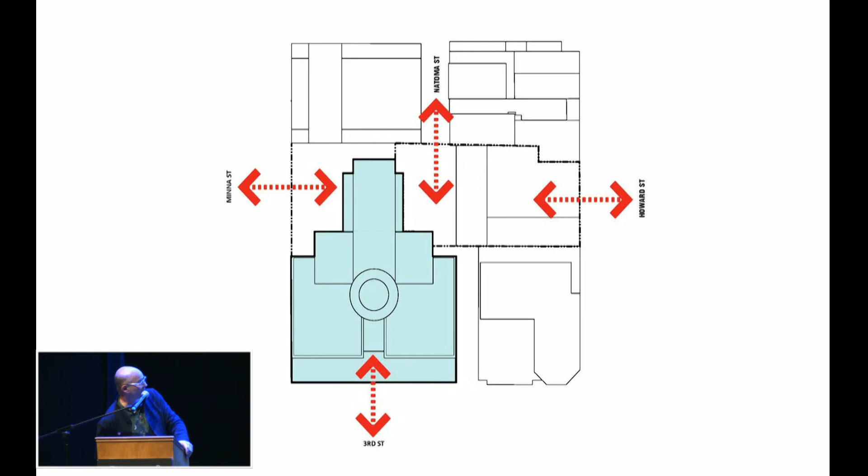So we made the building expansion having more entries. You can get in more locations. We also pulled the building away, like the school library in Canada. We pulled the building back to allow daylight and a feeling of security as you enter. Also, instead of making a square building, making this one new passage very severe, we bent the building so that it would create different qualities of light as you looked through from the old to the new.

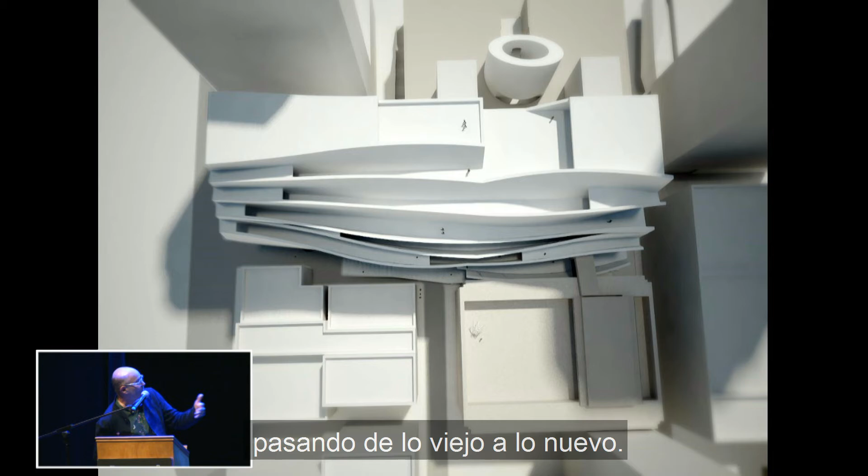When you walk along it, you see down these alleyways and these kind of amazing buildings rising up. What I like to do is when I've stood there on this narrow alley and watched people, they'll walk past it really quickly at lunchtime, getting their food and bringing it back to work. Sometimes they'll catch that facade out of the corner of their eye and they'll just stop and go, wow, that is something weird, what is that? It might only be for a few seconds. It might be that they're texting their friends with their phone in their hand, and then they look like that. Even if it's only for 2 seconds, that's a victory over technology that I feel I'm happy about.

If people just stop and look at their surroundings for a few moments, it's something we can be proud of as architects. Of course, usually after that two seconds is up, they go back to texting their friends and they're off again, not looking at their environment. But at least it's a moment that has value.

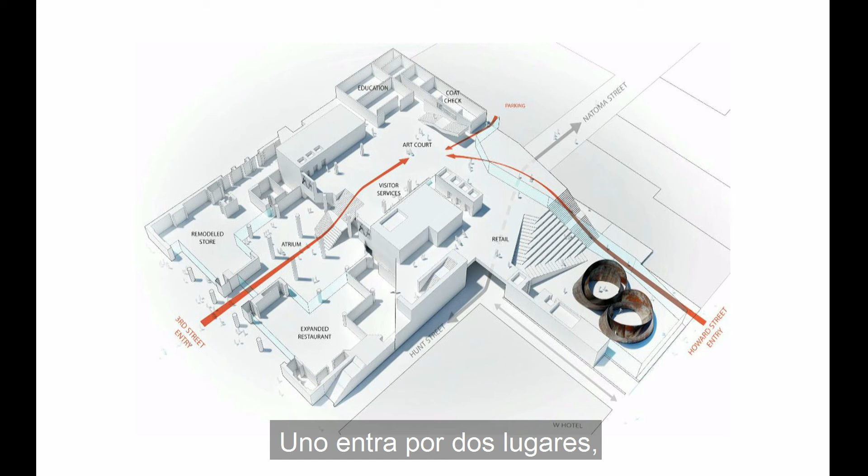You enter from two different locations into a sort of courtyard where there's art, and you can get up high and see over the art. As you move into the lobby, there's a view through the existing building to the new. We had to change the staircase of Mario Botta—happy to answer questions about that, but everyone was like, why did you pull Mario Botta's stair out?

Actually, it no longer met the fire code, so it was no longer safe from a fire perspective, so we had to do something, and we also needed to open up views through to the expansion. So that's our stair on the right, Mario Botta's stair on the left.

Once you rise up those stairs, you're in a main lobby where everyone collects, and you move up another set of stairs to a small raised garden, and some of the galleries look onto that garden. That garden is focused on a wall planted as vertical vegetation, with Calders inside the gallery and outside in the garden—so Calder, the artist, is being shown in both locations.